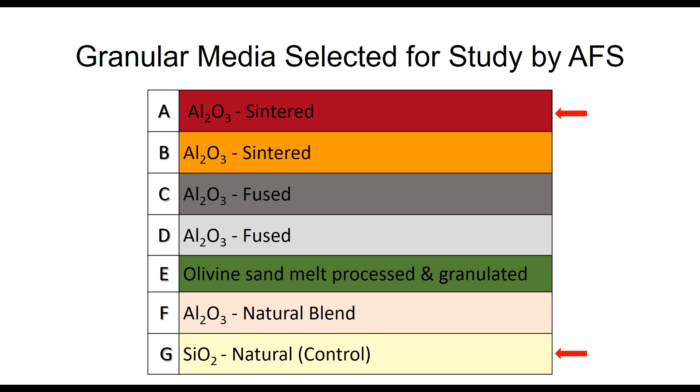In recent times, the AFS supported some research right here at WMU, and we employed similar types of strategies - how do we make better castings with the use of superior granular media? Today, the major focus is to compare System A, a sintered aluminum oxide, to System G, which is the control silica sand based system.

On this slide, I'm showing you the seven media selected by the AFS - these were selected solely based on availability of the media at that time for AFS to study. Across these materials you can see the properties we documented for the sake of this study. By no means are they all the engineered properties - certainly we can select mechanical, thermal, physical, chemical, and in certain cases electrical properties as we try to passivate certain sand systems as we pour them. But the fact is, for all natural or synthetic alternative medias, we could find useful properties.

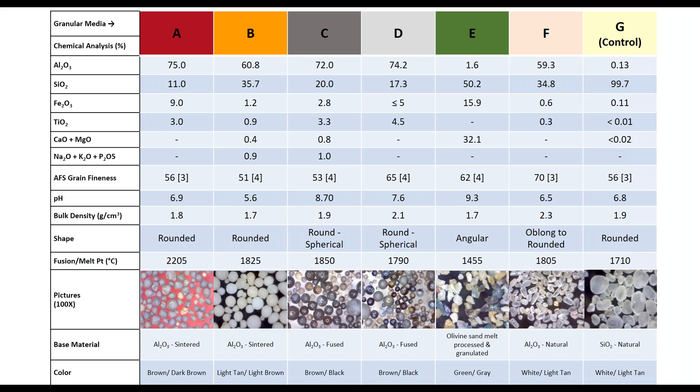As we look at ceramic sands, one of the things we need to understand is the as-cast surface quality. Today, when we talk about surfaces and castings, we're talking about machine surface finish or the surface finish from a sand casting. That doesn't really help us deal with the marginal benefits we get from ceramic sand media.

But way back when we began this research, we had a 2D means of comparing the silica sand in sphericity and roundness, so you could see the shape factors. But if we added the AFS GFN so that we could get the size comparison, we could get a 3D view.

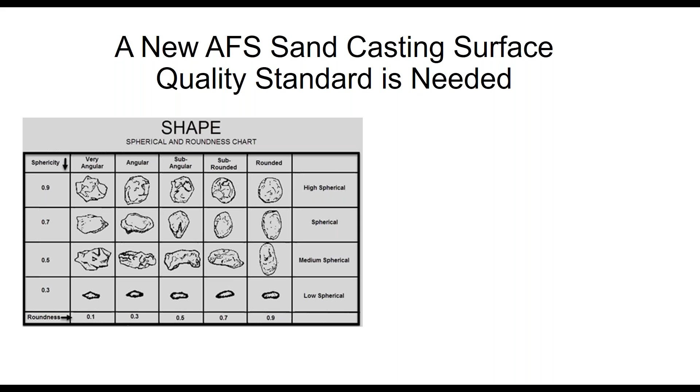Today, we have more sophisticated tools, such as non-contact measurements of surface finish, and I'll be showing you that later. What we're still using in the industry is a C9 cast microfinish comparator. This is the standard at AFS, and this does not allow us to get to digital production. I'll try to point out why that is important.

But certainly, if I get back to the grain shape for a moment, the idea here is just to let you know that the more angular, the more compounded that shape, the more chances that it could break down. And certainly this issue of durability is important for alternative media because these alternative media are significantly more expensive than silica sand. But there is no relationship.

Certainly, if we look at the grain fineness number as defined by AFS and the as-cast chemically bonded sand quality that we get, when we put a binder on that sand and it meets molten metal at the mold metal interface, that's where the magic happens. And that particular magic is due to thermomechanical, thermochemical, thermophysical properties.

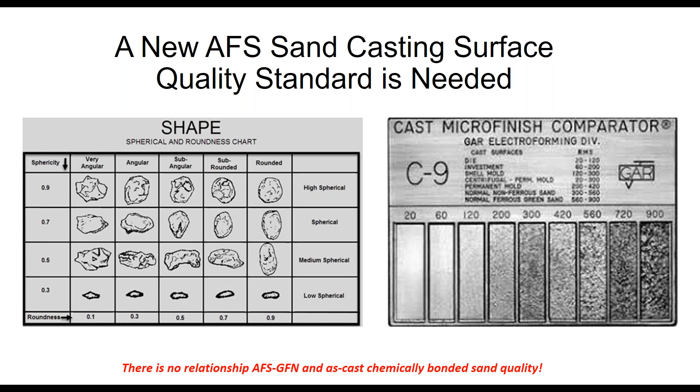I want to talk to you certainly about how do we get to qualify that. How do we performance-predict what will happen there? But before I go there, I have to talk a little bit more about the durability of these sands.

And what we do at Western Michigan University, because these are some non-standard approaches that have been placed at the forefront of AFS to consider, we look at a distribution of sand and we try to break it down according to the typical ways the foundry industry has that depreciation of that sand. And the two major mechanisms is really impact and abrasive wear.

Those happen time and time again through molding, melting, and filling, certainly at ambient, through elevated temperature. But should we look at a distribution, what happens is that we have the particle size change, especially the larger particles, and we have the distribution change at the same time. And because of that, it's hard to compare.

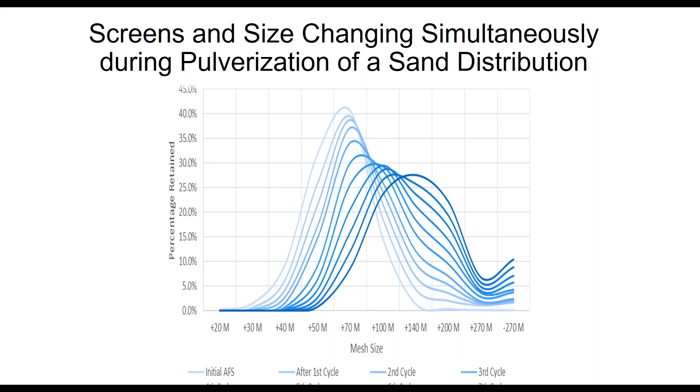So what I'm trying to suggest is that the smaller particles are protected. If we look at the distribution after impact and after abrasive wear, like I am depicting on this slide, such as a ball mill test or abrasion, the smaller particles appear as if there was no effect.

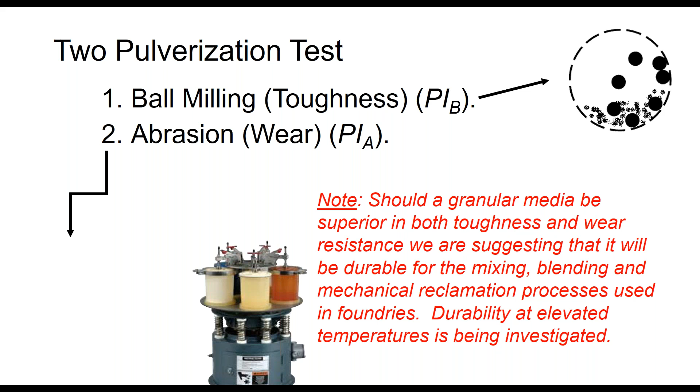But the point is, should a granular media be superior in both toughness and wear resistance, we are suggesting that it will be durable for mixing and blending, and the mechanical reclamation process used in foundry processing for these ceramic alternative media. The durability at elevated temperature is also being investigated in our work.

And what we're suggesting here is something that is true for all the media that we would see. On the left, I'm showing just two of the sands that we studied. On the left is the as-received compounds that we see in the material. And then after elevated temperature treatment, that elevated temperature treatment in the AFS study was 1450 degrees C, which is typically the iron processing temperature.

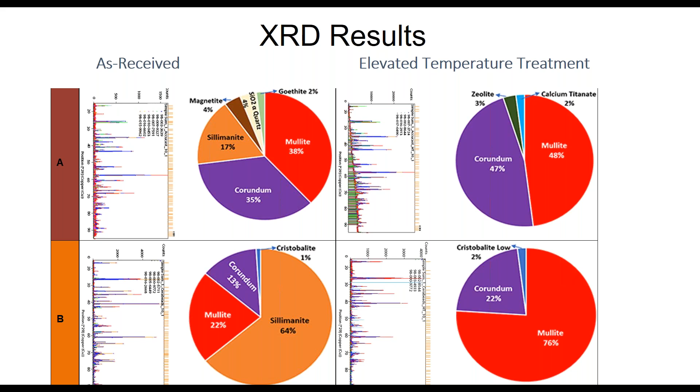And what you see, some of these hard compounds, mullite, corundum, sillimanite, these are in the top 12 hardest materials known to man. And they change in proportions when they are treated at elevated temperature. That also affects what we call the pulverization index.

This is a measure then of durability as we look at ambient to elevated temperature treatment, from abrasion to ball mill impact. And to keep things simple in our study, we weighted things rather equally. But what we are seeing, certainly as we look at system A, the system that we are dealing with in terms of a ceramic media, it is superior.

The higher number of the pulverization index is more resistant to that breakdown. And then system G is a silica sand.

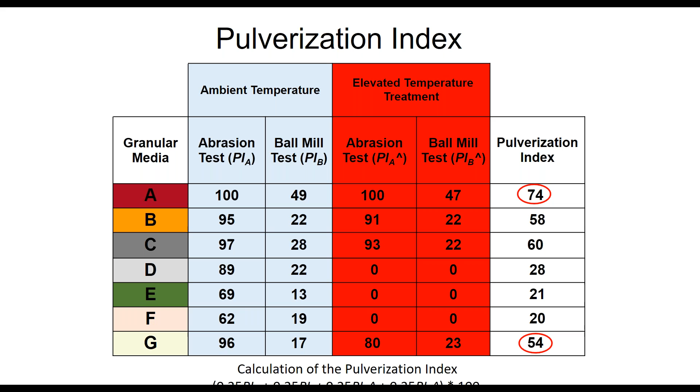The other thing that we'd like you to glean from this slide is the mechanism of breakdown does not always act the same. Certainly, we see the ceramic media as superior in terms of its abrasion and wear resistance, especially at elevated temperature. But if we could reduce the amount of impact in treating sand systems in the foundry, mold, melt, and fill, we'll also have greater life of our granular media.

The next thing that I want to address is issues around the chemically bonded sand specimens themselves. The specimens that we look to collect test data for the sake of process control, let's say. We have three different types of specimens in the industry.

We have a cookie shape that is now a standard, the traditional dog bone, and I'll keep things in simple shapes here, the Kit Kat bar, the rectangular beam.

Certainly most people know the dog bone for chemically bonded sand testing. The shortcoming with this specimen is it does not always break where it's supposed to, right at the slender, sexy part of the specimen. It breaks across the shoulder to the hip, or across the hip or the shoulder, affording specimen to specimen variability in a mechanical test.

On the 3-point rectangular beam specimen, that specimen works well mechanically, but if we try to heat it during test, we can't get any data because the failure mode is premature. But certainly as a mechanical test, the 3-point bend test is excellent for ultimate strength testing, bending moduli, shear, etc.

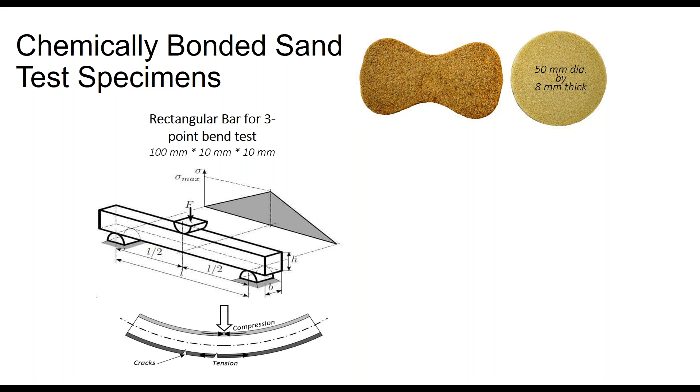So there are some reasons why we prefer the new alternative standard, the 50mm diameter, 8mm disc. There is no shape factor.

If we now go beyond mechanics to look at what is really happening in a metal casting process thermomechanically, thermochemically, thermophysically, if we take a simple shape like a disc-shaped specimen, we can heat it, we can learn more. The shape is simple, we can build it in our process and not have any residual stress in ejecting it from our tooling.

And then the heat transfer factor—again, the shape factor is simple. If we put heat at the bullseye of our specimen, we know where that heat will go radially and axially.

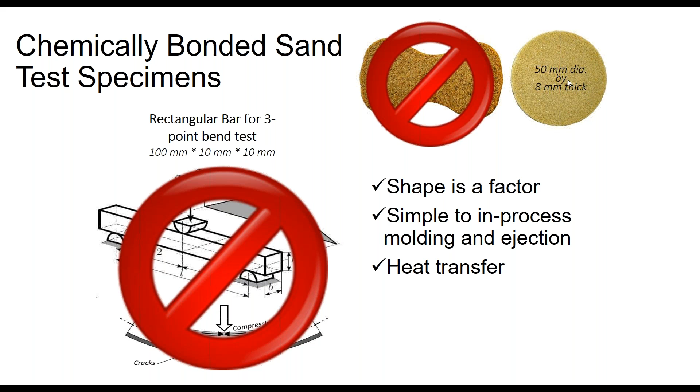But what is more, in order for us to acquire the proper data—let's call it smart data—that will coincide with digital processing in our industry that suffices Foundry 4.0, that's more of the reason why we need these highly well-distributed ceramic sands, so that the specimens using these materials coming from a process will give us in turn representative and smart data.

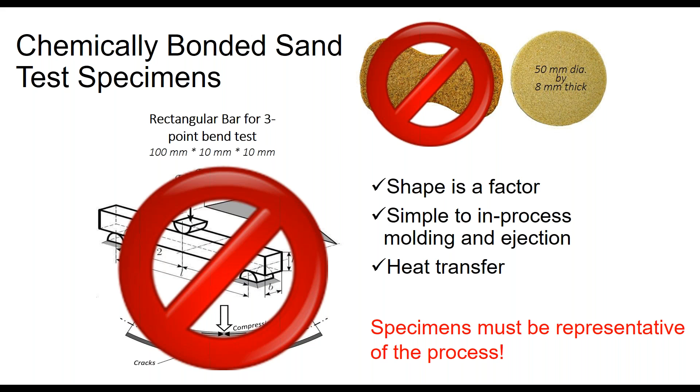How we get that data is what I'm showing you next, utilizing testing techniques on these disc-shaped specimens provided through the AFS. They are new standards circa July 2018.

All of these tests are dynamic in nature. What we mean by that is there are multiple properties that we run off of them. For example, in the simple impact test for mechanical properties, we could understand the impact properties before the specimen sees elevated temperature and after elevated temperature.

So that we could understand the mechanics in shakeout or retain strength, we can look at ambient to hot venting characteristics. The hot permeability test is telling us, can we really vent when the action is really happening, when we put heat onto that sand system?

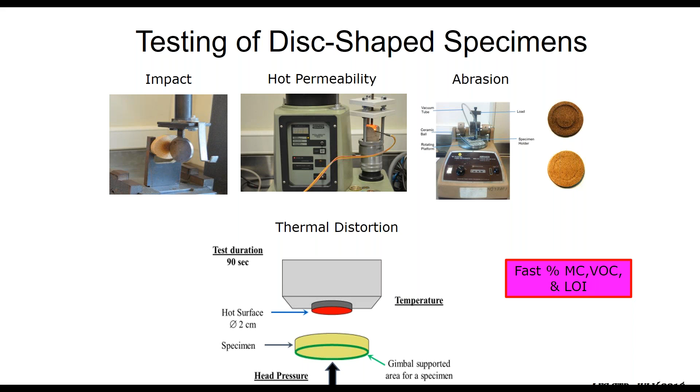And then the abrasion test will tell us about cure characteristics, hot to cold. But the preeminent tests around these are two. We can do a fast LOI, a VOC, and moisture in less than 5 minutes. But the preeminent test that gives us time series data, which is also part of smart data for process control, is the thermal distortion test, also known as TDT.

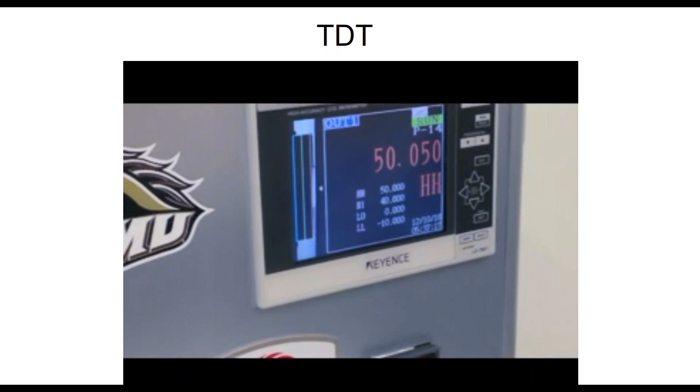So this is a semi-automated test at this stage. The specimen is brought in direct symmetrical contact with a hot surface. While we monitor temperature at the bottom, there's a sensor right there that tracks the temperature gradient from hot to the backside. And then we can look at the specimen in 3D as it expands radially.

It's 50 millimeters nominally, and then it's expanding here in real time. We also measure what is happening axially, and as well, as I mentioned, the thermal issues, and we're getting that data 3D in near real time.

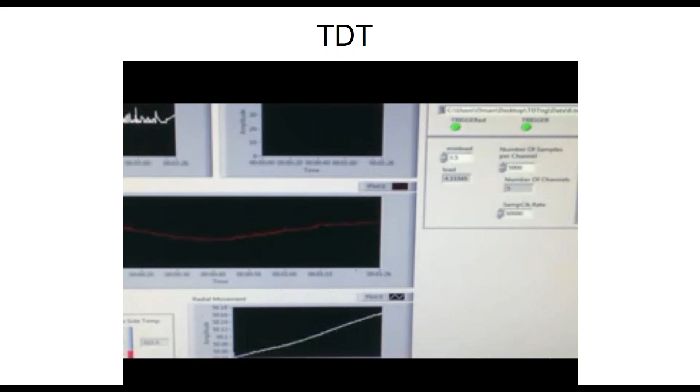The specimen comes out of this test typically intact, even though it's free to bend. The specimen is only supported 1 millimeter around its edge. So we have very valuable data, and again, time series data that allows us to do certain types of predictive analytics. I'm going to explain how we can study those things.

So what we do to these new test specimens, we affect how they are blended, or potentially the additives that we could place on them externally, like a refractory coating, or internally as other types of chemicals and compounds that we could add to the sand.

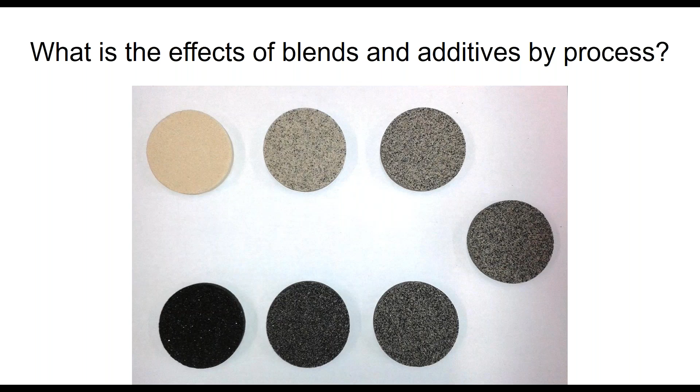The other thing I wanted to make good mention of, in terms of trying to get good qualification strategies from these advanced materials like ceramic sands, is in the testing themselves. We have to do that on these substrates that are discs that we glean from the process itself.

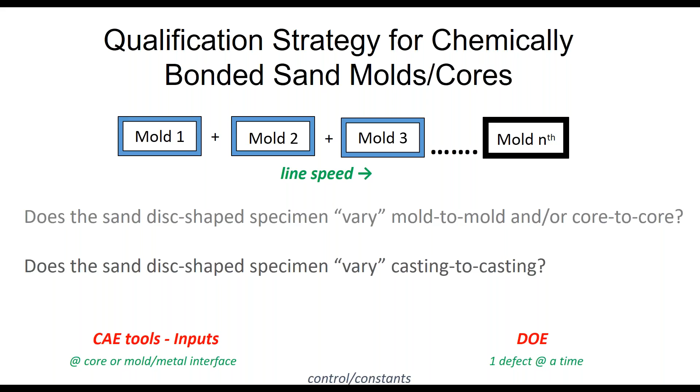This is very important because when we have a superior engineered material, we want to make sure the warranty and guarantee complaints that we may be getting on the foundry end are not due to the ceramic. So we have developed some casting trials as part of this qualification mode.

This one happens to be an erosion model. To show you how this works, it's several specimens that we can wet simultaneously from a given chemistry, at a given head pressure, at a given temperature.

I want to let you know that everybody in the foundry industry loves to look at temperature. They see the excitement, the danger of temperature, but we want to let you know that head pressure is equally as important in preventing mold metal interfacial defects.

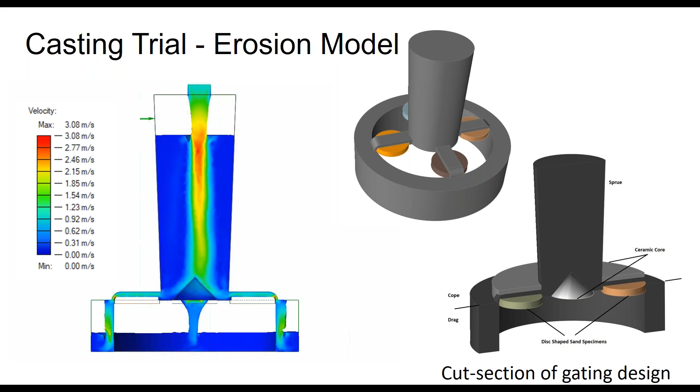But why is this important? These types of testing can allow us to respond to the higher order engineering tools that we have available, like solidification simulation. When we understand the velocities and flow that could cause deleterious circumstances in our casting process, we could get that digital data, whether it's a photograph, a picture, or actual boundary conditions that we could upload into our solidification simulation software. We'll show you how that works in an upcoming slide.

On this next model, we call it the cookie and donut model, because there are cookies shown in the drag half on the mold to the right, and we place that in symmetrical order on a core print where we wet these specimens again from a given head height, at angles, and through a filter that will allow quiescence.

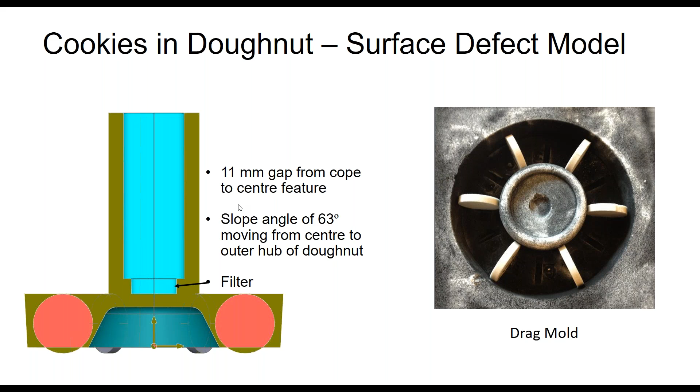Recipes, different head pressures, etc., to understand what would cause certain concerns. And here are some of the classic concerns: the veins, the penetrations.

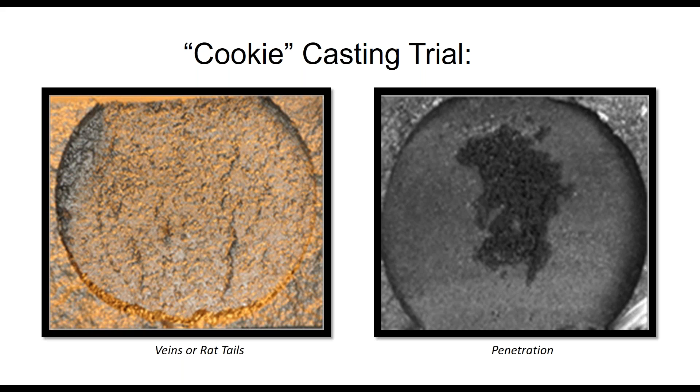These particular terms are foundry defect terms. You're not going to find them very well if you Google them. The point is, we want to prevent this, as well as get a superior surface roughness relative to the as-cast surface. That is important.

We can evidence this today non-contact, with technologies like I'm showing you here. A 3D macroscope could show us what is happening on our disc-shaped specimens in the molding room, and then in the finishing room we can see this on the casting. We can get surface roughness, volumetric change, ambient temperature differentials.

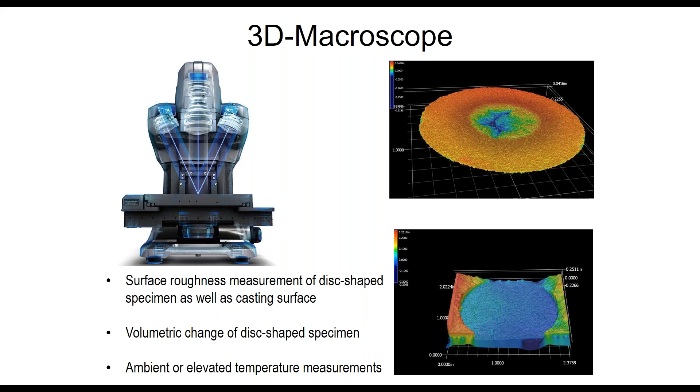We can have that data. So any shift between the molding room and the finishing room, we know that digital data, that digital shift, and we could be responsive to it and give information back to the foundry in near real time.

So regardless of the process, we need to qualify the sand binder systems for head pressure, temperatures, and chemistry. Again, the AFS work that is documented and available is devoid of a proper understanding on steel castings. We have started that work where we are understanding the mold metal interface at steel head pressures and temperatures relative to surface conditions like shakeout, and then the surface roughness, to come up with an overall measure for casting quality.

On this slide, I'm showing you a system that could shake out well at a core print for the same energy, and another system that can't shake out on a steel casting, even with a ceramic sand. This is because we did not understand the combination and the fluxing concerns that may happen if we inappropriately choose the wrong engineered scenario for these sand binder systems.

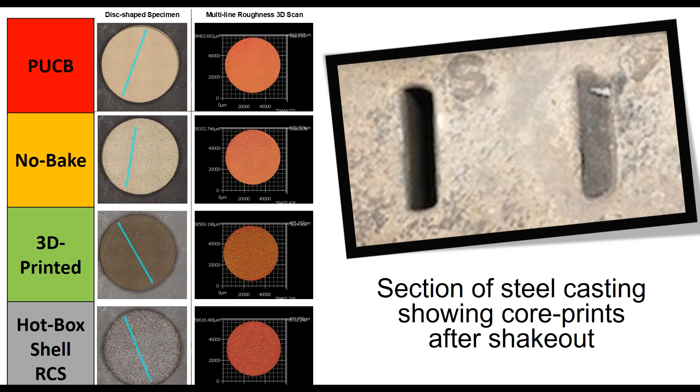So that needs to be studied, and we are ready to do that. So these are the ideas behind our thoughts.

So a statement that was made on our AFS research is my closing comment: there is no panacea for alternative granular media for use in our foundry industry. We must qualify them and understand the thermomechanical, thermochemical, and thermophysical considerations to make superior castings with superior materials, such as the ceramic sands. Thanks for your attention.

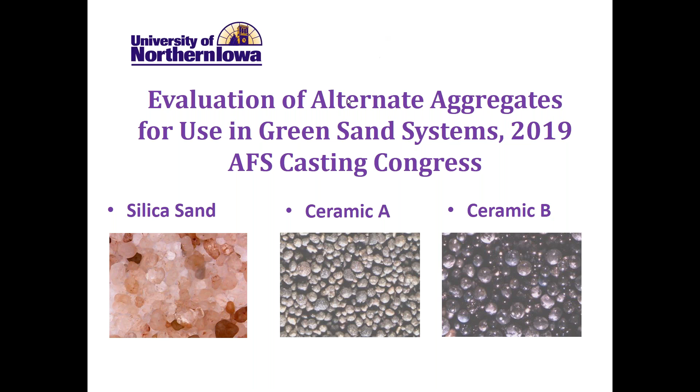Most of the information you're going to see presented by me today was a result of an AFS research project, which was requested, and the evaluation of alternate materials to replace silica sands in green sand molding systems. So most of the information I'm going to present is angled towards replacing silica, but in a closed loop system where new material isn't added continually for green sand dilution.

We worked with 3 materials. Our base material, the one to be compared to, was silica sand. Ceramic A was an agglomerated domestic grade product produced in the US. Ceramic B was a Chinese imported material. And we'll see some differences later on in those materials.

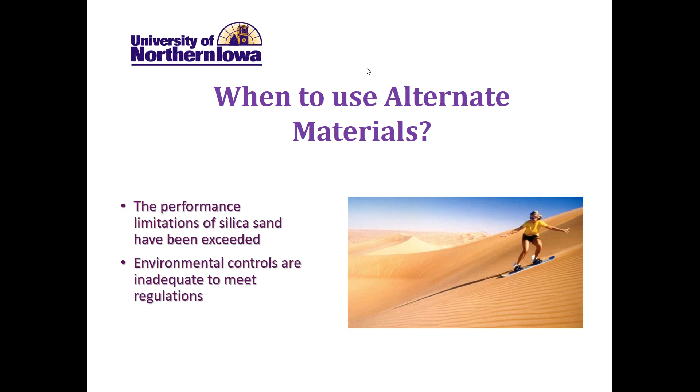When do foundries use alternate materials? Of course, we know that silica sand is the most abundant and most cost-effective molding aggregate in the industry, although it comes with issues. People use ceramic aggregate materials when the performance limitations of the silica sand have been exceeded, or their environmental controls are inadequate to meet the regulations. And those regulations I'm speaking of would be the OSHA permissible exposure limit for respirable silica in the foundry.

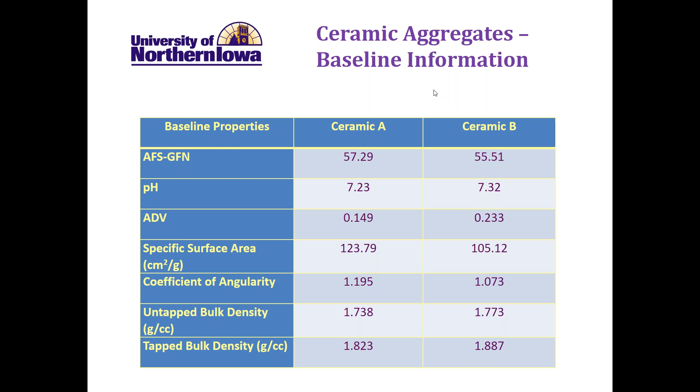Baseline information for the 2 ceramics we tested: they were both around 55 GFN. We chose that because that probably is a very common GFN for both iron and steel foundries. Similar pHs, similar ADVs, both very low. Similar specific surface areas, both very round in their shape, with similar densities.

One of the first tests that we perform on materials for looking at the applicability in molding processes is high temperature thermal expansion testing. We want to make sure that we're not seeing drastic changes in the morphology of the material or thermal breakdown due to high temperatures.

We'll run our tests up to 1650 degrees C, which is much higher than normal pouring temperatures for iron castings. And as we increase the temperature, we put a small amount of force on that sample. What that allows us to do is see very accurately where the sinter point of those materials are. To define the sinter point, it's the point at which we get liquid on the surface of the sand or the bead that allows those beads to adhere to each other.

So if we've seen silica sand castings, heavy gray iron, we usually see a small adhering layer of sand that's easily broken up. That sand has exceeded the sinter point, so it adheres to itself.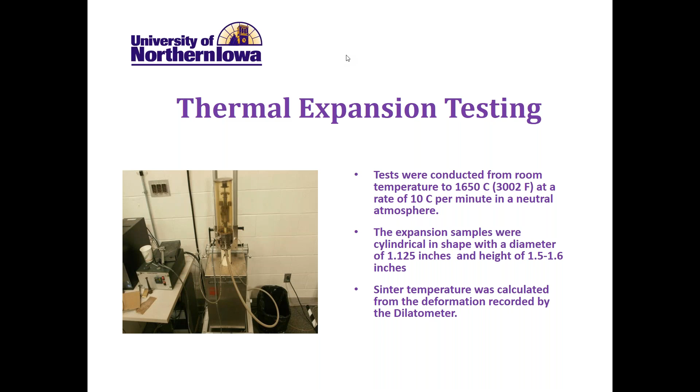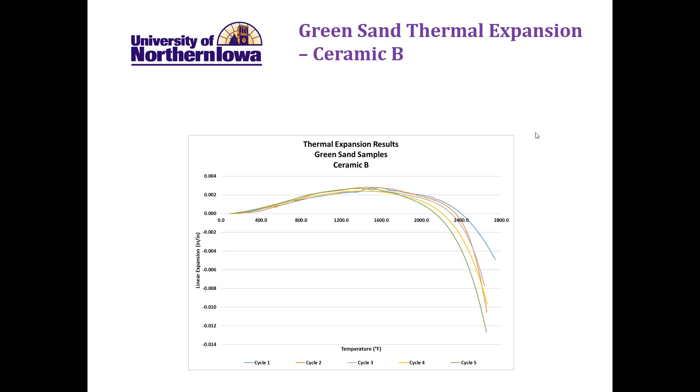Ceramic B, slightly under 2400 degrees. When we look at the sinter points of these 2 materials, we can see that the domestic product, ceramic A, had around over 120 degrees higher sinter point after 5 cycles. Now the cycles include mixing the sand, mulling the sand with bentonite, producing castings, shaking those castings out, and having a proportion wet reclaimed back to new.

We did this because then we proceeded to make cores, phenolic urethane cold box cores, out of that reclaimed sand, and then use the balance of the reclaimed sand plus the cores for our green sand dilution. This was a closed loop system, so every bit of sand that was used in cycle 1 was also used in cycle 5.

So this simulates a foundry being able to use that sand over and over again. We can see a decrease from cycle 1 over to cycle 5 because we are building up some contamination on that sand that was not reclaimed. We feel that previous research has shown us between cycle 5 and cycle 8, we reach equilibrium, where we no longer see a decrease in the sinter point of the sand. It should also be noted this is the same for silica sand or any of the molding aggregates you may be using.

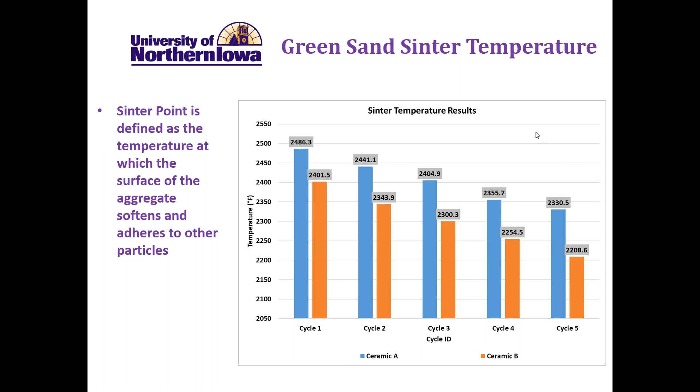Our attrition testing was based on what has been done historically in the Sand and Gravel Institute. The American Foundry Society does not have a breakdown or attrition test, so we had to borrow someone else's. We did this by placing 5 pounds of the aggregate along with 5 pounds of ceramic tumbling media. After 4 hours, we would separate the tumbling media, and then test the sand in screen distribution.

One of the important points I want to bring up is that there would be performance advantages in using blends of ceramic and silica, and that oftentimes is true - casting quality and casting surface can be improved. The issue with doing that is that the ceramic material has almost twice the hardness of some silica sands. So you can imagine using both materials in a system, a green sand system - the ceramic material will actually grind the silica into dust. So if the ultimate goal is reduction of respirable silica dust, this does not help. It actually increases the dust generation in a foundry.

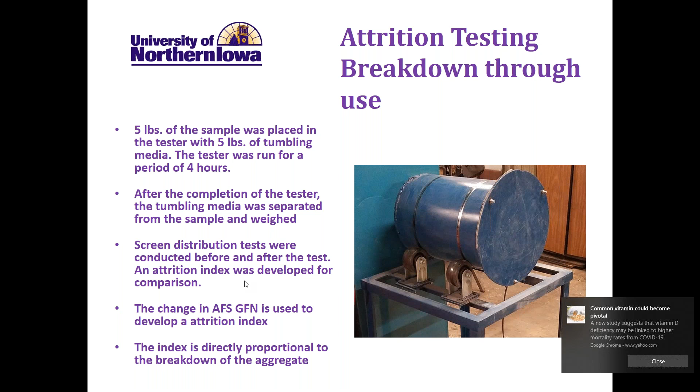Now the AFS index, or the attrition index we use, was something very simple: it was the difference between the original AFS GFN and the AFS GFN after the material went through the attrition test. There's something really interesting you should see on this. The blue line is the original, before attrition, value or screen distribution of that sand. The interesting point is the balance of the curves - the results are attritions 1 through 5. Notice that the majority of the breakdown of the silica sand happened after the first, or during the first, attrition. After that second cycle to the 5th cycle, there was very little change in attrition index or change in grain fineness.

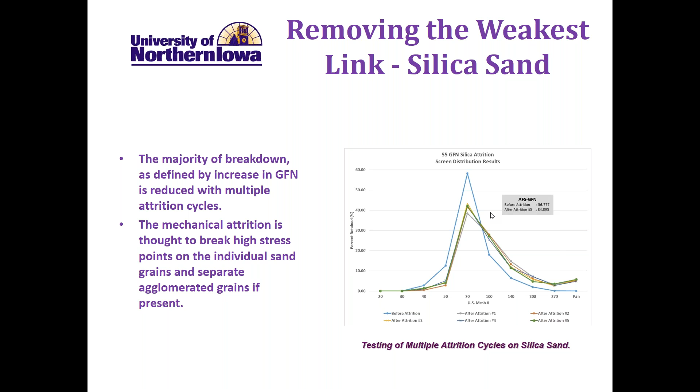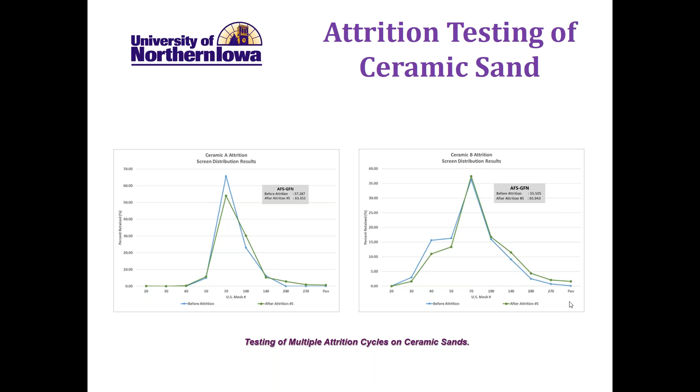We can compare the ceramic A attrition with the ceramic B, and you can see the changes. Ceramic A lost quite a bit less, resulting in quite a bit less on the 270 and pan. The 270 and pan screens are representative of the silica dust that can be generated with that sand. It is not respirable at that sizing, but it is representative of the amount of dust. We can see on ceramic B, we had quite a bit more on that 200, 270 and pan, so that material was breaking down to a finer extent than ceramic A. If we take a look at it in tabular form, we can see that the attrition index in the silica was 28 grain fineness numbers. In ceramic A, less than 6, and ceramic B a little more than 11.5. So major improvements in the breakdown of those sands.

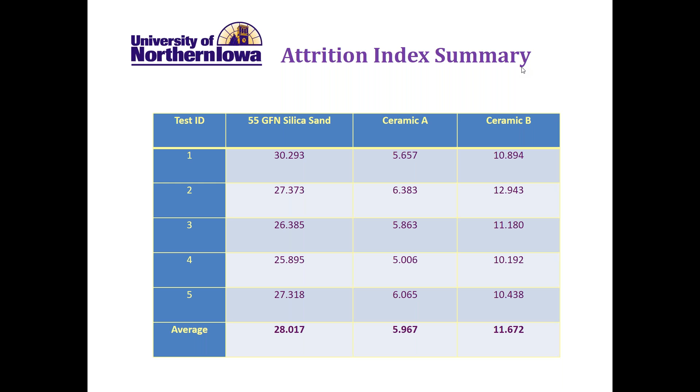How do we measure the respirable dust? Well, we looked at measuring real-time results. So anytime we move sand, whether it's off the end of a conveyor belt or off the end of a continuous mixer, we see dust being generated. We want to be able to measure that dust when we move the sand. So we are looking in the range of respirable particles measured in micrograms per cubic meter, in the range of 0.1 micrometer to 10 micrometer range. This device was able to measure up to 20,000 micrograms per meter cubed, much over the OSHA standard PEL.

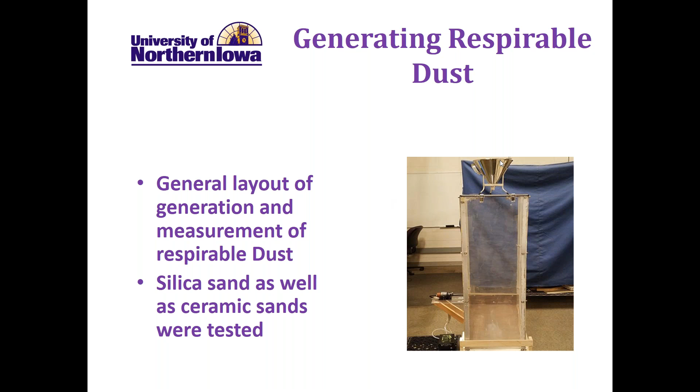The general layout - we have a funnel. We drop the sand through a 1/4-inch diameter hole, falling approximately 40 inches. Now this is done dry, unbonded. And then the sample of dust was collected from the dust monitor, measured as peak as well as time dependent. So we could measure both the amount of dust coming off and also the peak amount that would be measured in the device.

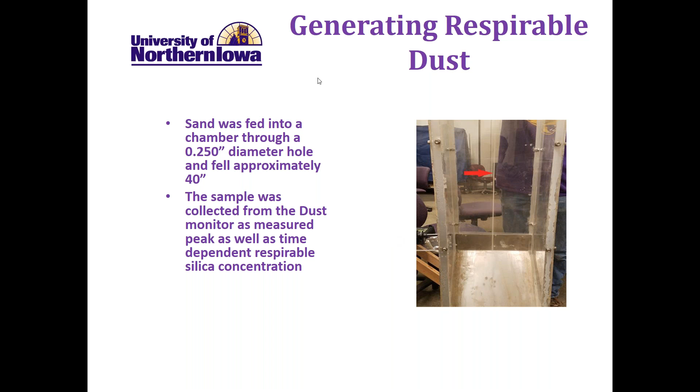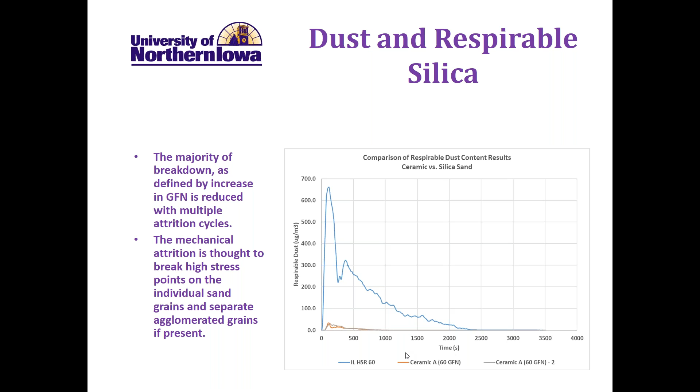Because this was a test for green sand applicability, we did what was called a mull down test. In this, we mull bentonite, sea coal, and water with sands, then measure the initial properties after 5 minutes of mulling in a 2-wheel or vertical wheel muller, followed by measurements every minute out to 12 minutes.

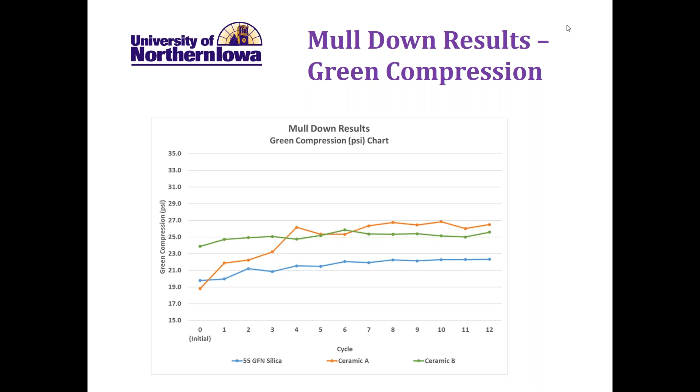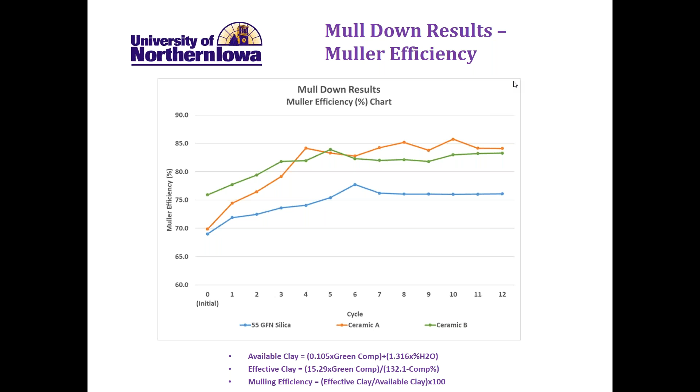If we take a look at what we call the muller efficiency, which is how well we are developing those properties—you can see the calculations on the bottom of the screen—once again we see that the ceramic material had a higher muller efficiency than the silica material did. This is an advantage, meaning more consistent, higher properties with an engineered material.

Is there any questions? Well, we can go on to the question.